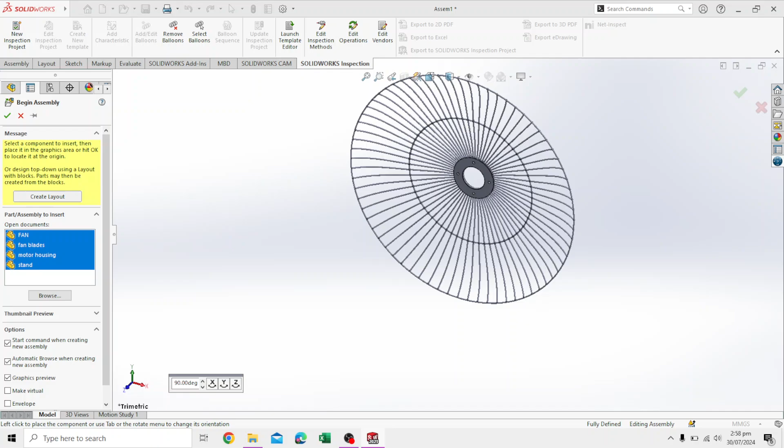They're going to appear here in this document. Now they'll appear at your cursor. You'll have to click to place them one by one. Make sure to place them at different points. Place them here, place them here, and then place them. No need for this exact arrangement, just placing them a bit far away from each other.

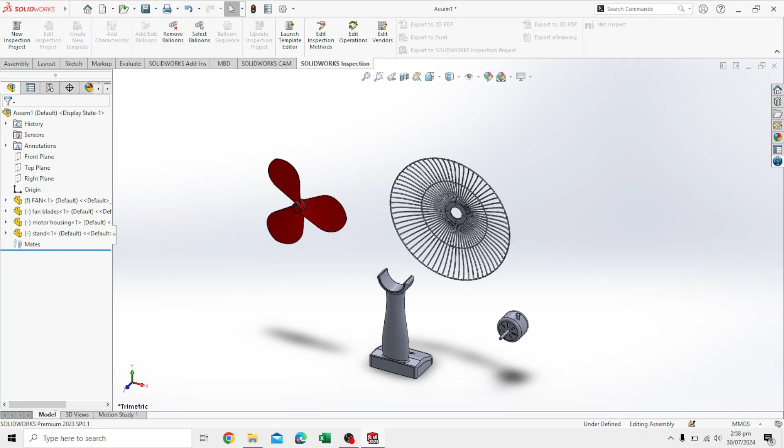So now moving forward, I will right click this and say fix this. And I will right click on this - sorry, I didn't right click properly - and say float.

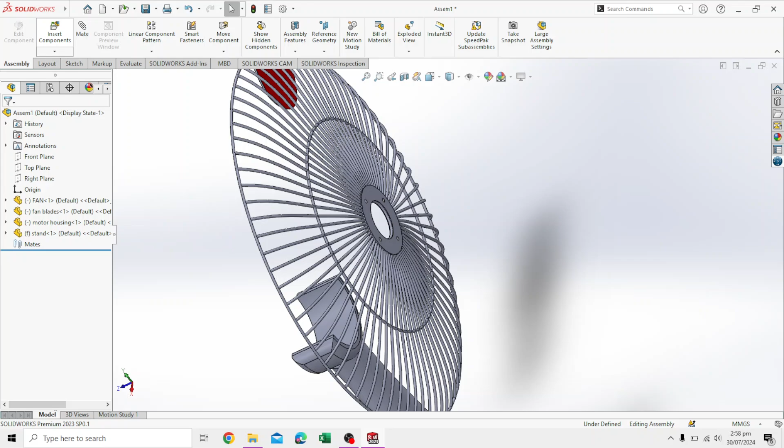Next thing we will do is go to assembly in this top left ribbon. And in this assembly, there is the option to insert components. Click this, and it will again open this folder wherever you have it stored.

It might not open it. You can just go manually and open the folder, whether it be desktop or wherever you've stored it.

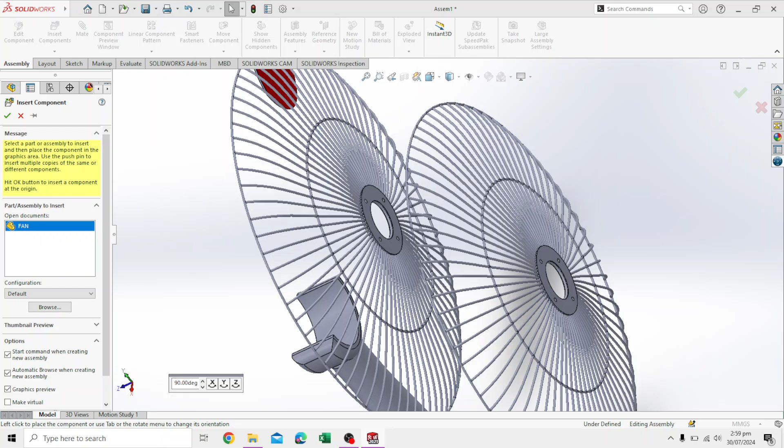We need another one of the fan shroud, the grill that basically will sit behind it. So obviously all fans have two grills. So now we'll start assembling this from this point of view.

First things first, we will select this command called mate. You see that drop down menu, click that,

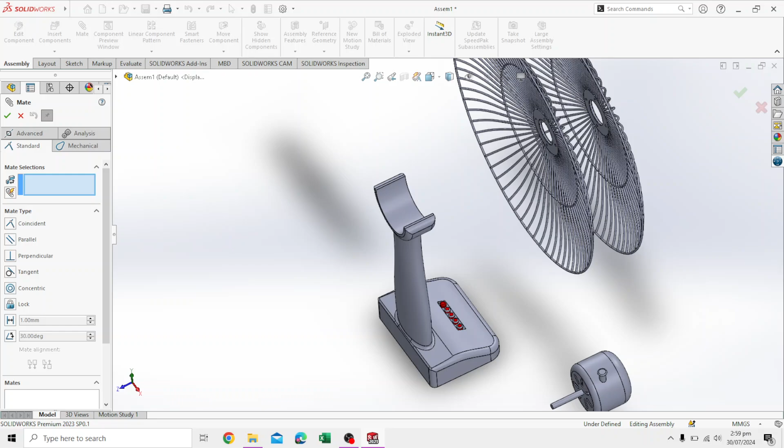and from that we will - just a second, let me just rotate the motor. The motor is facing the wrong way. This shaft should be facing this way.

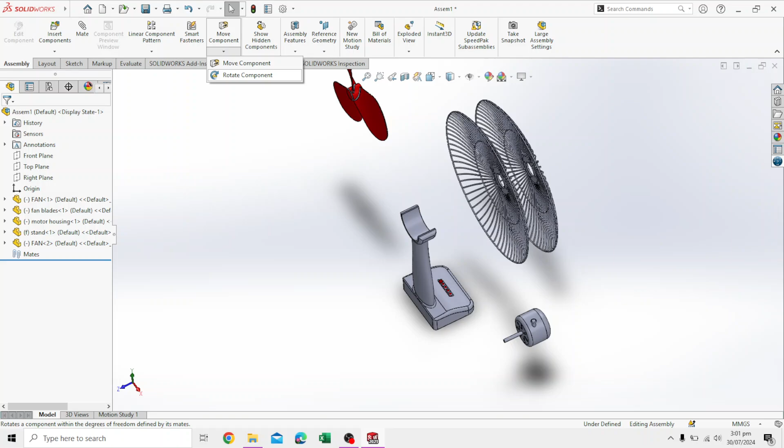So we will use this command. There's move component, there's a drop down menu. We'll go into rotate component, and in the rotate component we'll click this and just simply rotate it so that it's slightly facing the direction.

Let me just do this. Yes, this is how we want it.

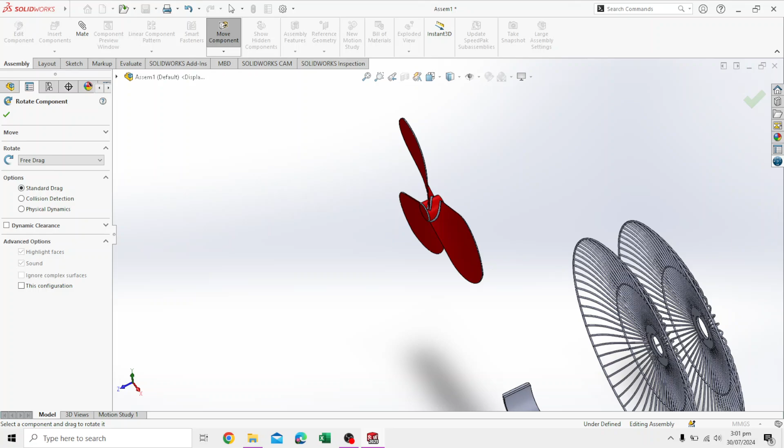Same with the fan. The fan is facing the wrong way. This side is the front of the fan. So we'll just grab it by the blades and face it somewhat appropriately, not perfectly, but you'll get the hang of this once you start doing this. But anyway, let's start assembling this.

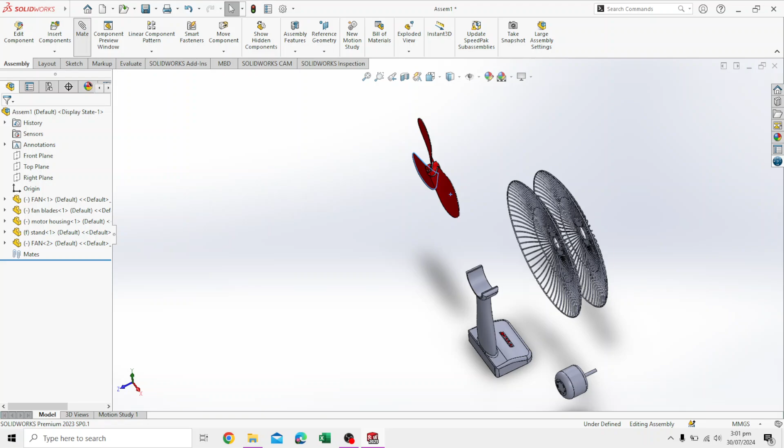Deselect and select this again, the mating application. In this, the fan blade's already selected. We just deselect that - whatever the last thing is, once you select the mate command, it pre-selects the last thing you touched. So you need not to do that.

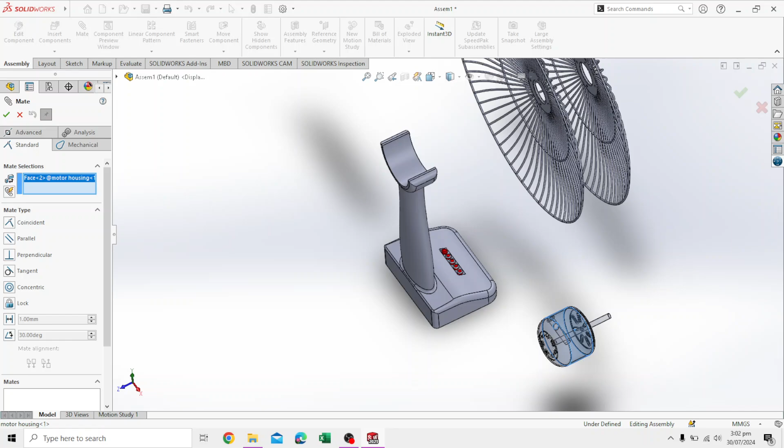We click on the motor. It's not selected for some reason. Okay, now it's selected - this face of the motor is selected. And then you click, this is the place where I want it to be.

Okay, now it's saying what relation you want these two to have. So obviously the motor is a circle, and then this curve in which it's going to sit, the stand, is also a circle. So we say that we need a concentric relationship. This means the centers of the circle of the motor and the circle of this curve are both at the center, meaning it perfectly sits in the stand.

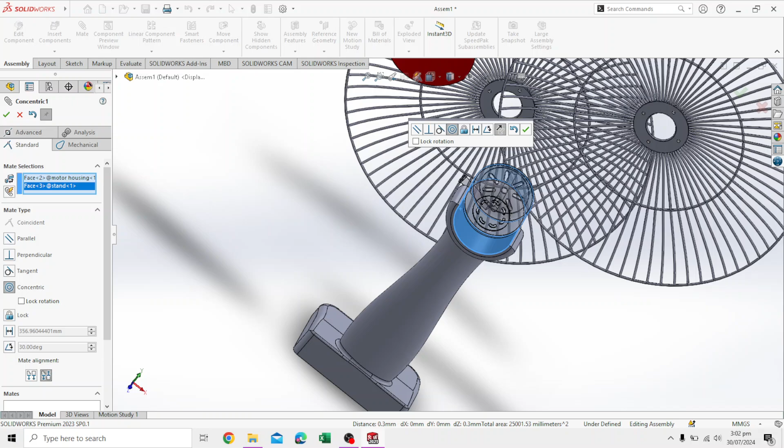So we select this concentric and then we press OK. Yeah, after that we still need to align this properly.

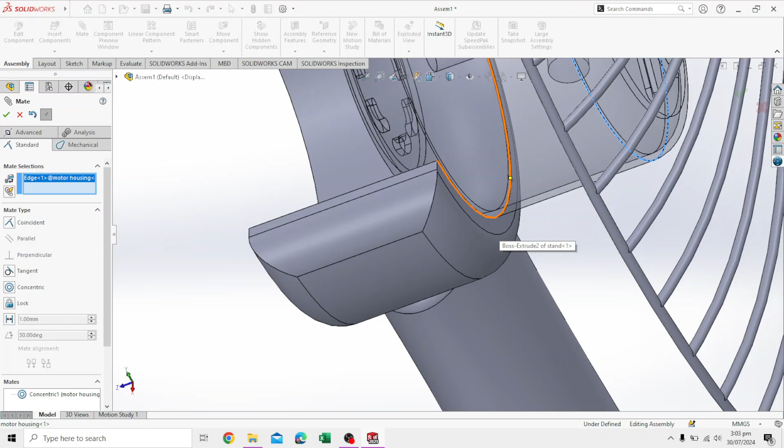So we click on this edge of the motor. Okay, it's selected - it's already saying edge if you see it in the left window. And then select this edge of the stand. Now it's completely aligned and perfectly sitting in the stand.

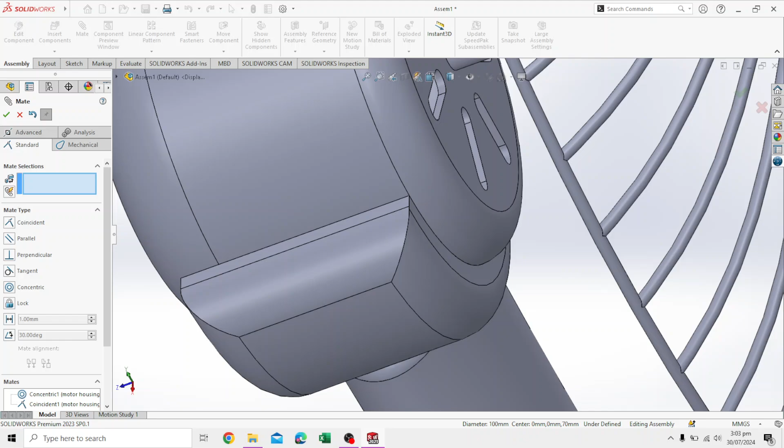It's already pre-selected coincident, meaning that both of these lines should be touching each other at all times. So we say, okay, this is what we need. And now, no matter what you do, it's not going to move in any other direction other than this. You see that the top button for the rotation control was in the wrong place, so you can just manually drag it here, and now it's fixed.

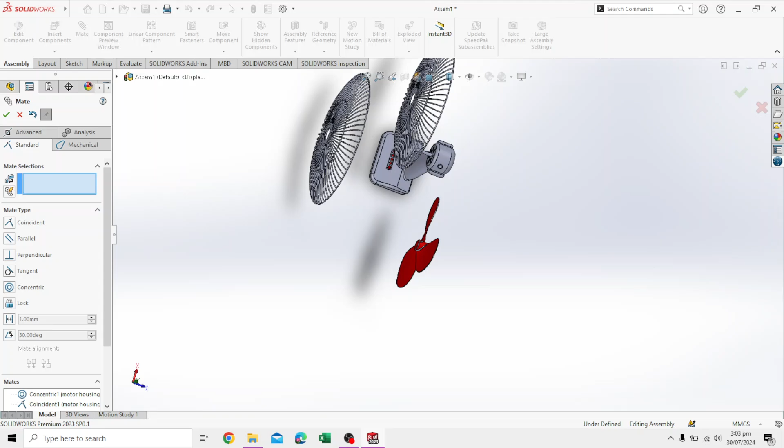So one of the things you're going to notice in the parts that you've created following my video is that this shaft is smaller than it actually is right now. This shaft is actually very small, so once you place the fan on top of it, the fan is almost touching this face.

So what you can do in that situation is escape out of the mate command and all the parts that you've created. This is the tree for the shroud. This entire tree, all these commands that we carried out to make this tree, are present here. This is for the blades. This is for the fan motor.

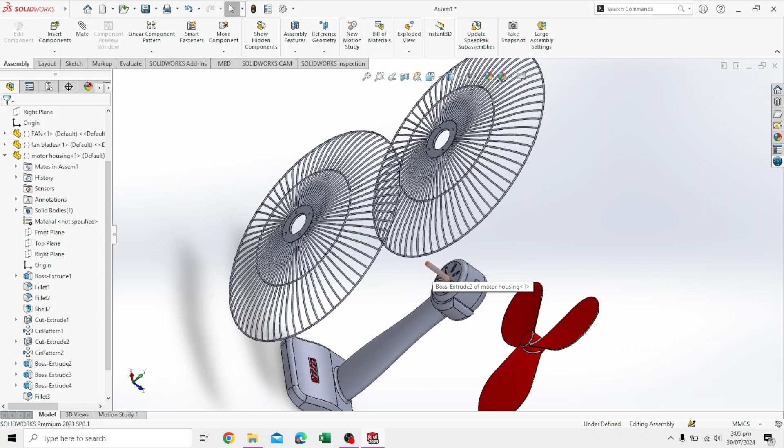So all I did was simply go in, open the fan motor housing, and scroll through the commands individually until the shaft is highlighted. This is the command I use to basically extrude the shaft. Click here, just a second, click here, and it allows you to edit sketch, edit feature, right? You can just go in and increase the value. The current value that was entered there was, I think, 70 or 80, and I increased it slightly more.

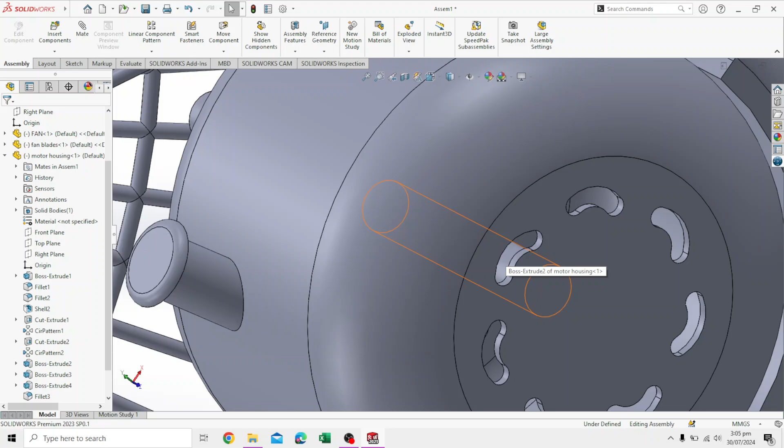Just making sure that the back of the shaft - because it's a mid-plane extrude, this shaft is increasing in this way as it's also increasing behind, so you might be able to see it through there, it's coming into the vent, so make sure it doesn't come out. All you have to do is go into this extrude and increase the value. You can see the shaft, how far it's going in, but it's not touching the back, so you can just increase the value.

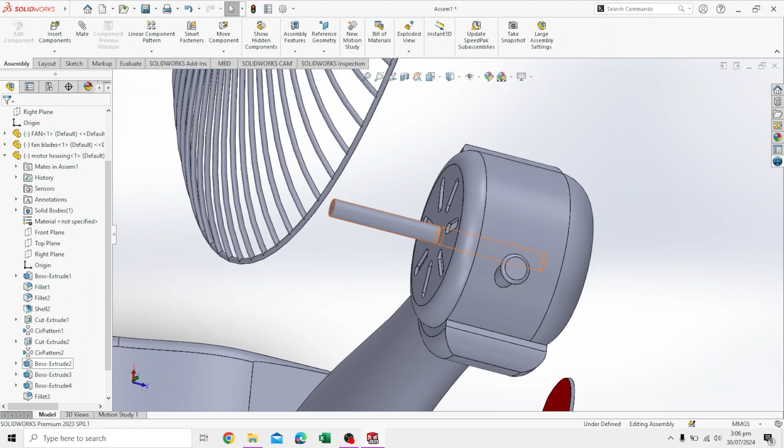When you do this, it's going to ask to save the assembly somewhere. You can just save it anywhere you want, and then proceed to change the length of the shaft so that the fan sits perfectly in such a way that it does not contact this shroud or the grill.

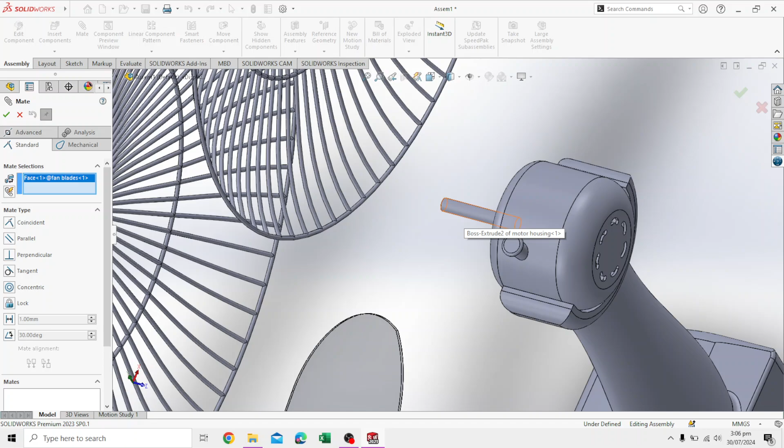Now moving onto the actual assembly, let's assemble the remaining parts. Go to the mate command, and in the mate command, now we will first select - it doesn't matter what you select first, you can select the other one first. Select the inside surface of this hole in the fan that will be sitting on top of the shaft, and then the body of the shaft. It's going to ask again what relationship you want these two surfaces to have.

We'll say it's concentric, the same thing we did for the fan and the stand, which is basically the circles of the hole and the circle of the shaft. The centers of these two circles are in the same place, so we'd say concentric. It's already pre-selected. We just say okay, this is what we need.

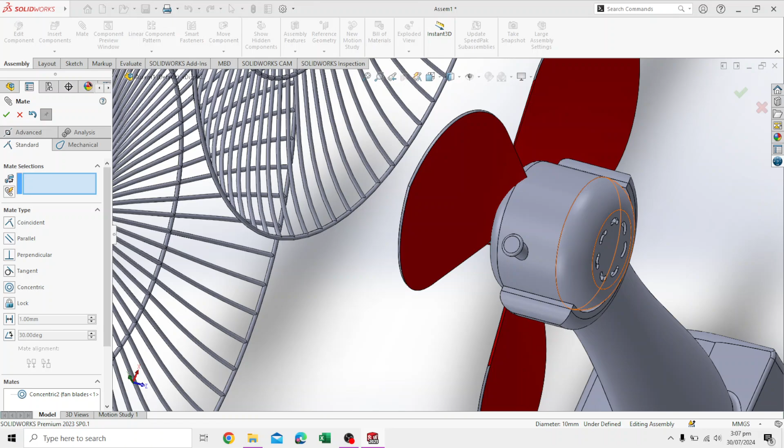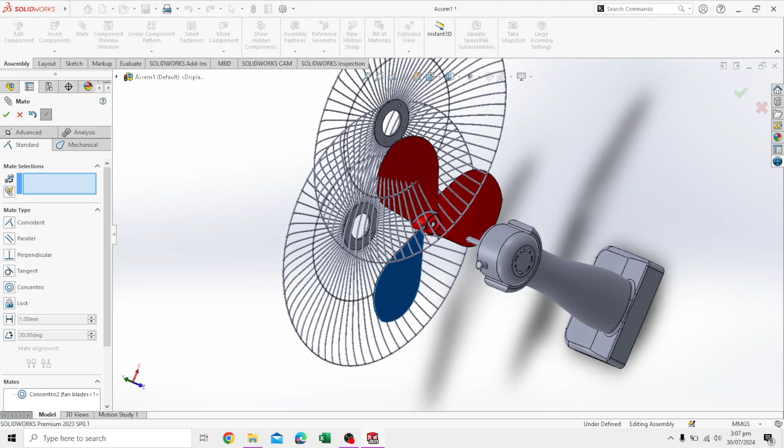Now you see the fan is going way too far back, so you just drag it out like this. The fan is locked in place, but we still need to lock it in the other dimension so that it doesn't move out or in like it's doing in this case. We don't need to lock it in rotation, so it rotates, but we do need to lock it in this direction, in this axis. This is basically the z-axis. If you look here, this is the z-axis.

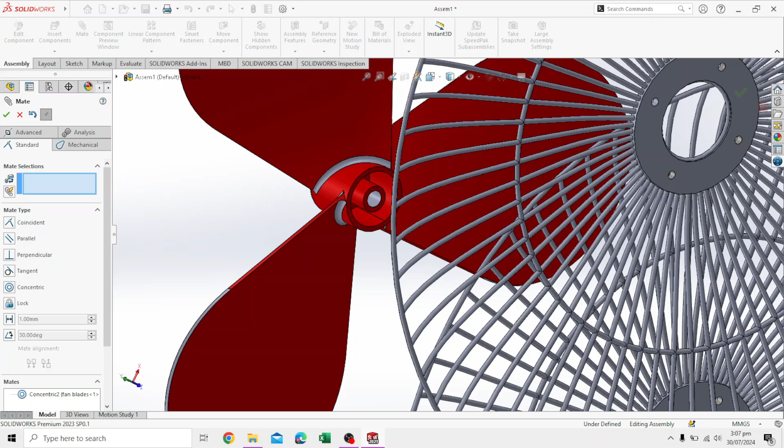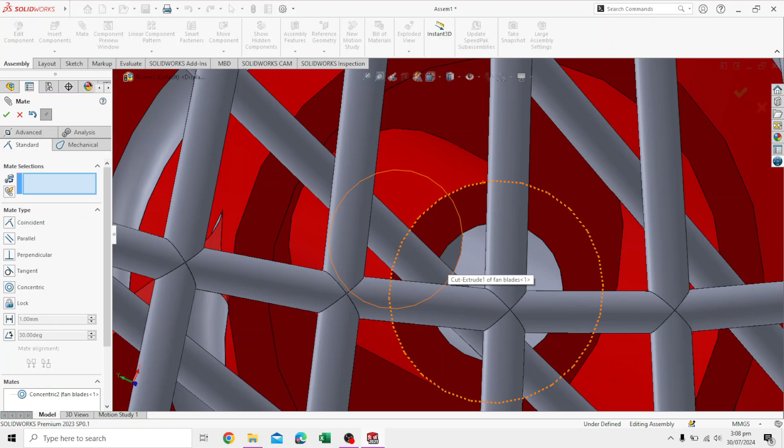Anyway, what you do is simply move the fan far back away and do this. Zoom in - we need to look into that hole. There's an end to that hole, there's a back that we need to be able to see and access. There we go, I see it - that back end of the hole. Click that, it's selected. Face 3.

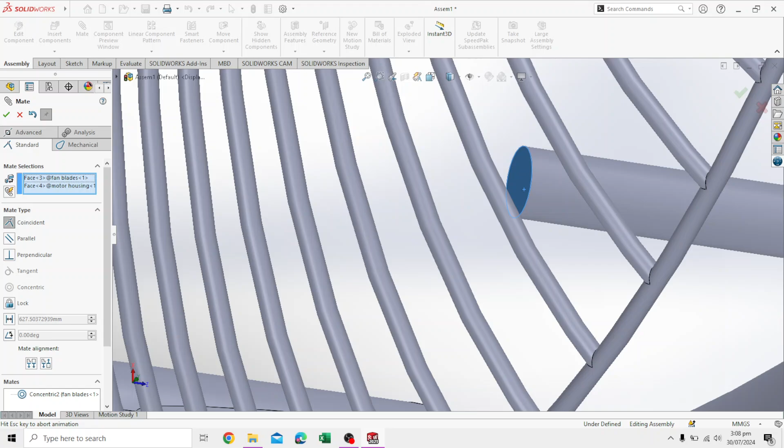And now we do the same with this face of the shaft, because that back end of the hole will obviously contact this face. We click here, and now both of these are merged together. It's asking what kind of relationship you want these two faces to have. We say coincident - we want them to be touching each other, making contact with each other. We say okay, this is what we want.

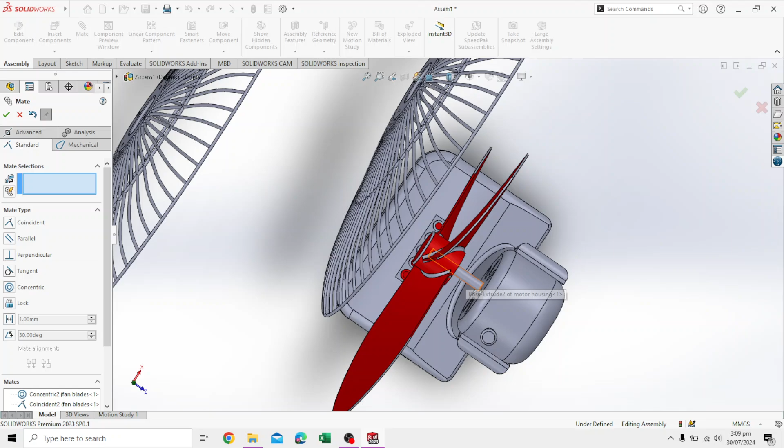And now the shaft is here, and the fan is mounted. Again, if you have the shaft or the motor made in such a way that the shaft was smaller in the original design, you can just increase the size of the shaft by using that tree and the value.

The second problem I encountered and removed was the fact that the fan blades were too large. They were too big to fit into this shroud, so they were clipping through it.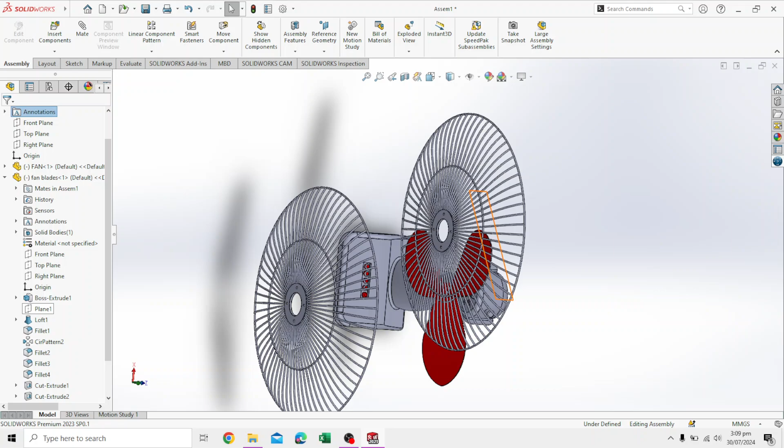So to fix that, let me show you. You simply go to the fan blades file that we saved, and in the tree of the fan blades you scroll down until you reach this plane. You see that this plane is sitting at the tip of the fan blade, and it was basically used by us to set the height of the fan.

So what you're going to do is click here and then edit feature. Its value is most likely going to be 350. What you're going to do is decrease it to 200. This height of the plane, if I deselect or select something else, will decrease. You say okay, it'll take a few seconds to process and apply all the operations, and then the fan will shrink in size, so the blades will be smaller and fit perfectly.

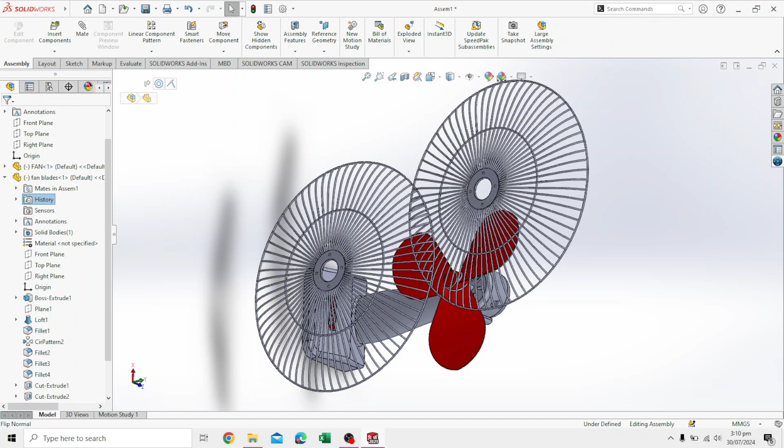This is one of the positives of having this in the assembly, that you can just manage or control the individual components and their sizes, even during the assembly process, just in case you've made a mistake previously.

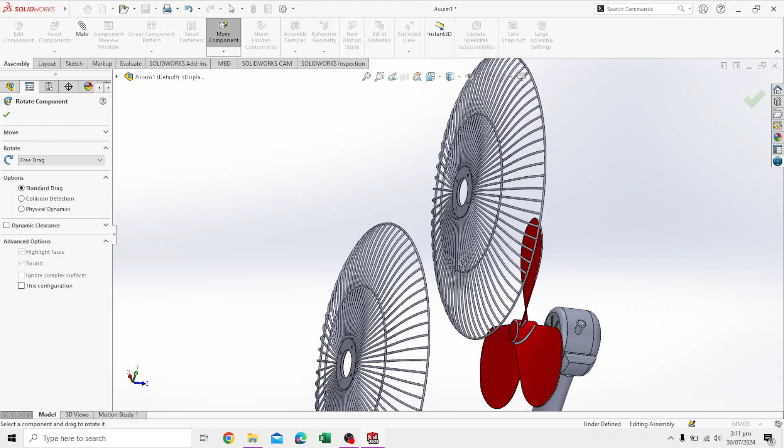We're going to select the move command and the rotate component. In the rotate, we're going to rotate one of these. Okay, this is the rotation needed.

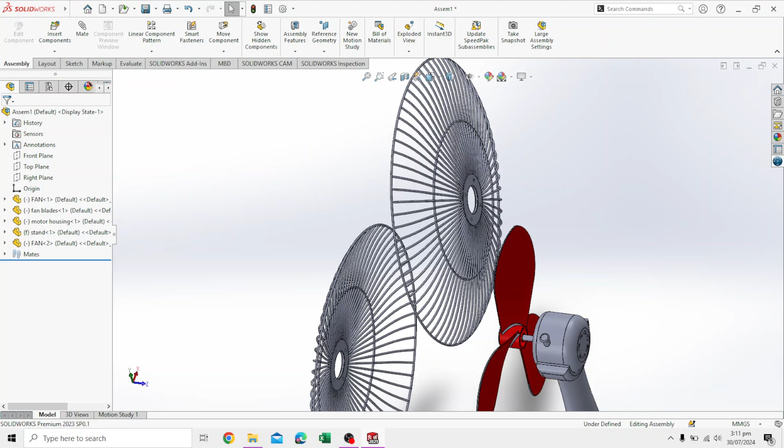We go back to the mate command. Don't worry about the fan size, even if you do it later it doesn't matter. After you assemble it, you can change both the shaft length and the fan height of the fan blade. You can simply go and decrease the size in their individual trees. The first number that appears in those trees, once you start editing, will be the height you need to change for the shaft and the fan.

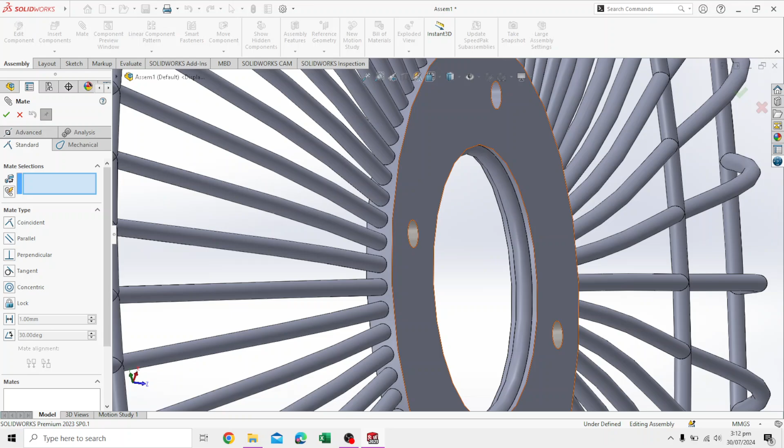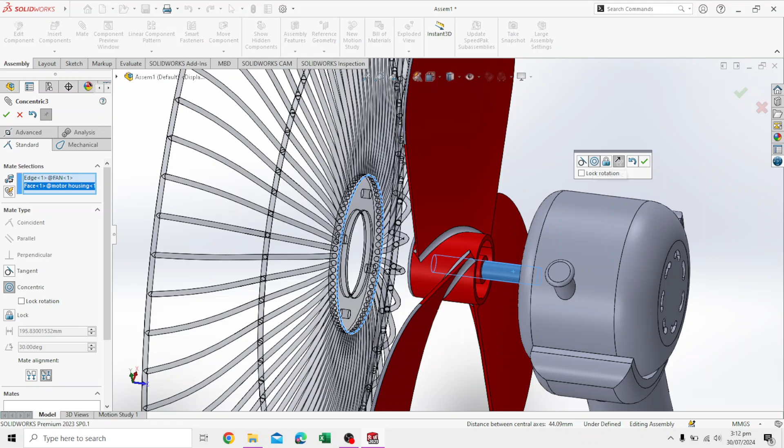Firstly, we select the mate command. Now that we're in the mate command, we select the edge of this. This edge is selected, it recognizes it as an edge, and we select the shaft secondly. Now it aligns them both and asks what the relation between this edge and this shaft should be. You say concentric is already selected, and you say okay, this is what I want.

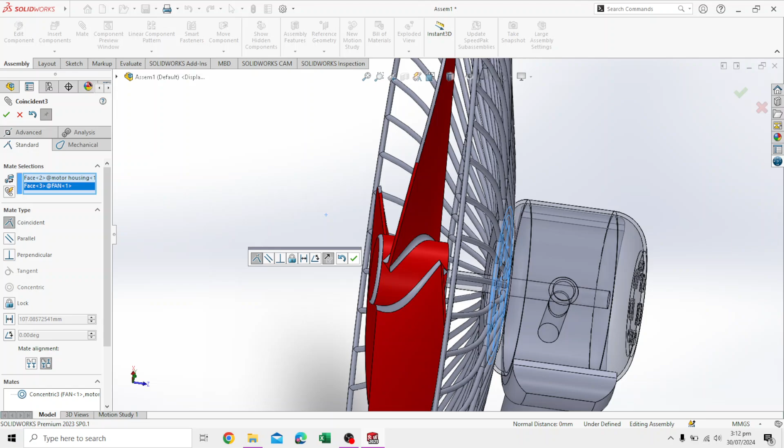After that, you need to touch this surface with that surface. So you select this surface, regardless which one first, and select the other one, and it contacts it and asks what their relation should be. You say coincident, meaning they're both making contact. Say okay. In this case I've already decreased the height of the fan, but in your scenario the fan will move out, with its fins flipping through and coming out from the back side, colliding with it.

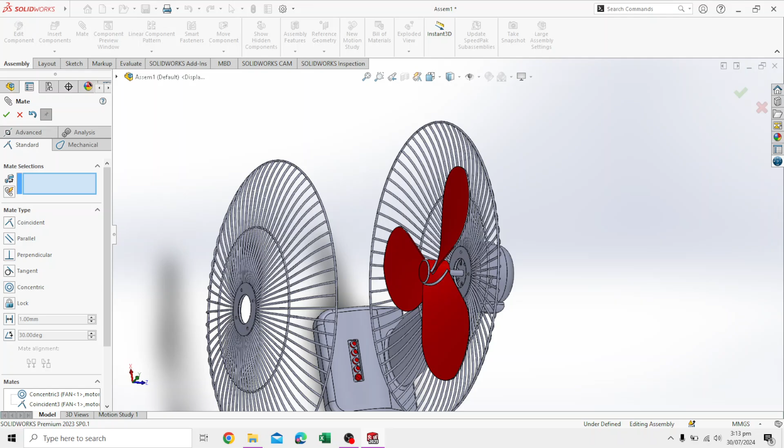Again, we do the same procedure with this. We click on this edge, select it, and then click on the shaft. It'll ask what kind of relationship you want these to have: concentric, meaning both centers of the circles are at the same place.

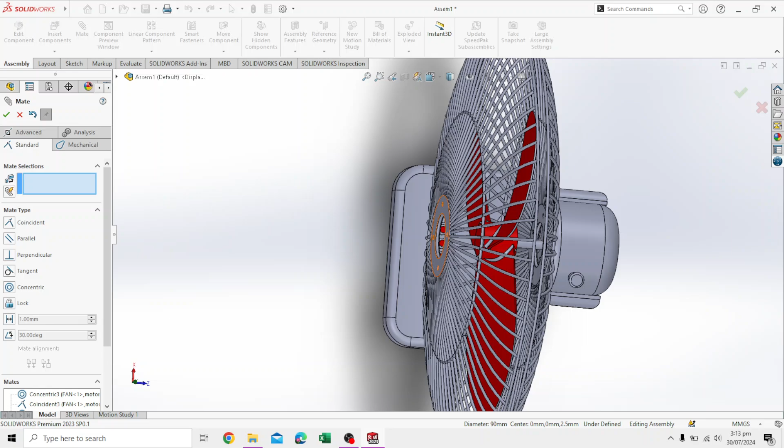And then you basically hold and drag the fan shroud in such a way that it makes contact. You can see it making contact with the rear shroud, and there you go.

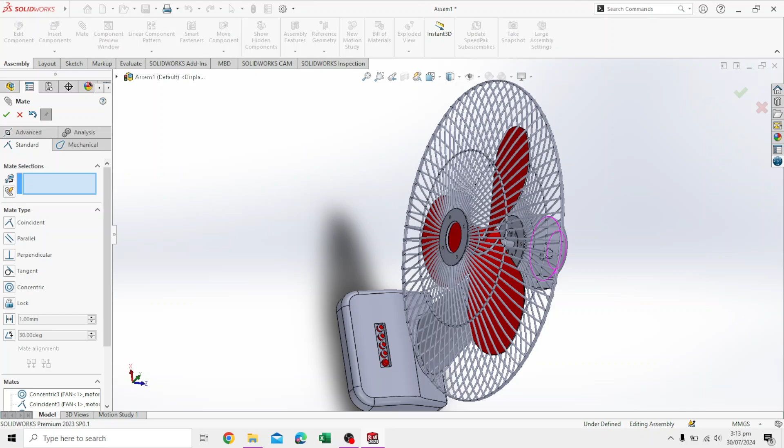Completed. The grill is complete, the fan is complete, buttons, the motor housing, everything is in place as it should be, and it looks very nice. Thank you for watching.